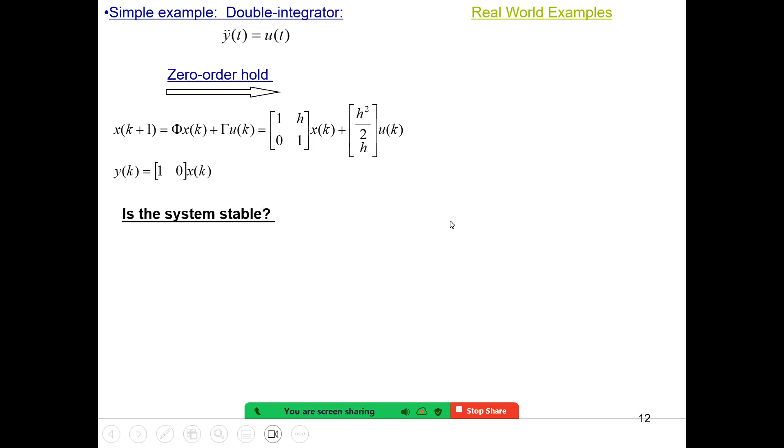One, but it's a repeated pole. So therefore, is the system stable? It is unstable. It is not even marginally stable, because the one is a repeated pole. We emphasize that, so it is not stable.

Then we need to build a feedback controller to change the behavior because the system is unstable. Then we need to place the poles to some desired positions. Can we do it? Let's try the proportional control, or the state feedback.

So, minus L xk. If I write down the individual terms for the controller, it's just L1, L2, a linear combination of the state variables. And then we want to find out what L1 and L2 are to meet the requirements.

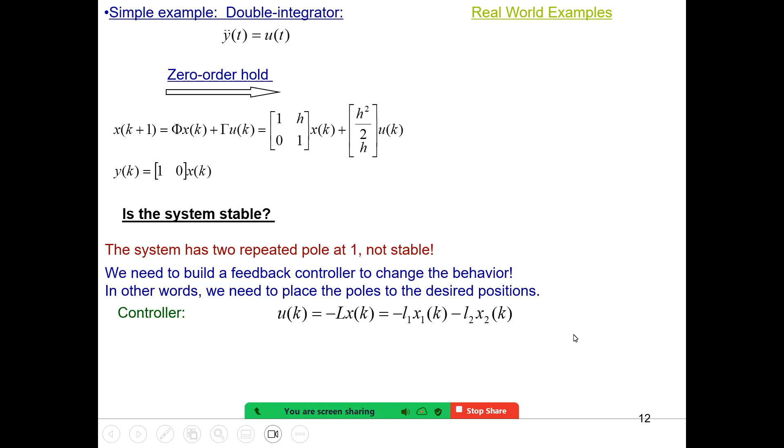Okay, then let's just plug this expression into the system. This is the model. Now we replace this u by minus L x. Overall we get phi, and this term becomes gamma times L x, so phi minus gamma L x.

Now notice, for the original open loop, the matrix is phi. So after feedback, the matrix changes into phi minus gamma L. So the system matrix has been changed by feedback. That's the whole point of feedback: it will change the property of the system, because the eigenvalues of this matrix phi have been changed to the eigenvalues of this different matrix, phi minus gamma L. And the L are the design parameters.

We can change the poles. Okay, this is where we are: we want to compute what L1 and L2 are.

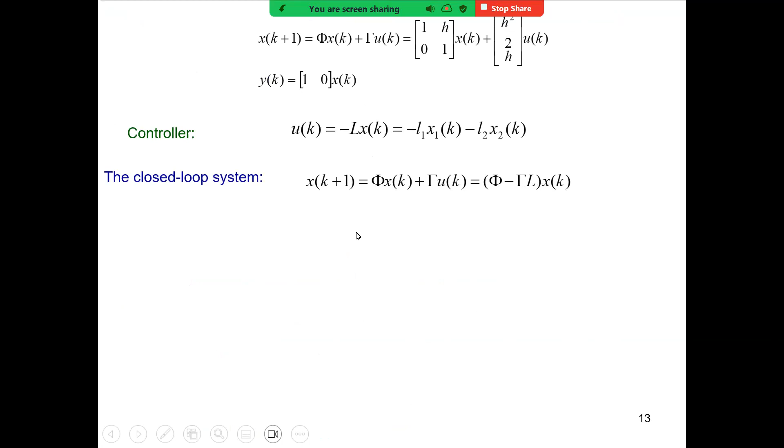Now this is one way: just plug in your equation into the closed loop. You want to find out the poles of this closed loop, which will depend upon your L1 and L2. So how do we design the control gain L? Let's do the calculation.

So this is gamma, this is L. We do the matrix multiplication, and we get a 2 by 2 matrix. Then there's phi minus gamma L. We already know phi, phi is here, minus this gamma L gives us a different matrix from the original, 1, 1H.

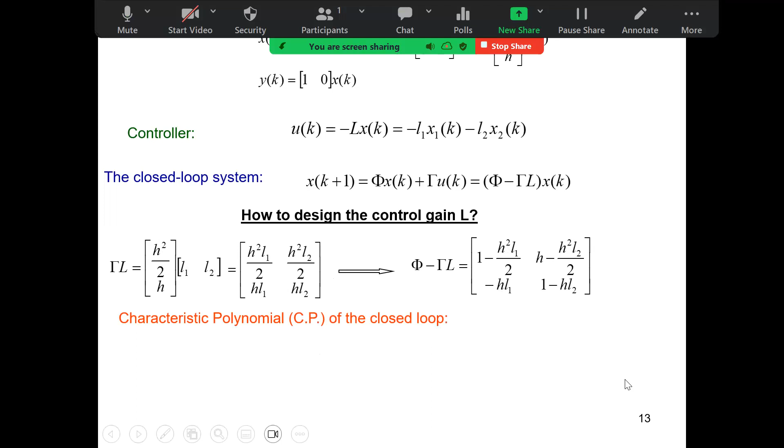Then we can compute the characteristic polynomial of the closed loop, of this phi minus gamma L, which is computed using the identity matrix I. So this matrix will change: the diagonal term, the I, so Z minus this term, and those two terms get a minus sign, changing the sign. That's the meaning of this matrix. Then you try to compute the determinant of this matrix, which will be the characteristic polynomial of this matrix phi minus gamma L.

Of course, then you know how to compute the determinant: this term times this one, minus the multiplication of those two. After some organization, you end up with a second order polynomial. From this polynomial, you can tell there are two coefficients, and those two coefficients depend upon the gains L1 and L2.

Okay, this is where we are. So we use the feedback control, or the proportional control. Then we change the characteristic polynomial of the system. Now the coefficients depend upon the gains.

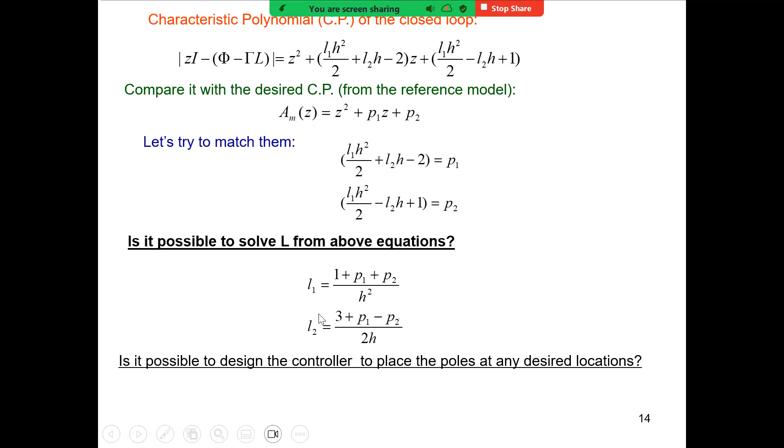Well, for this double integrator, now we can answer the question: is it possible to design the controller to place the poles to any desired location? Yes, because for any desired location, which means I can put any value of P1, P2 — that doesn't matter. As if I know P1, P2, I can compute my L1 and L2 to make the match.

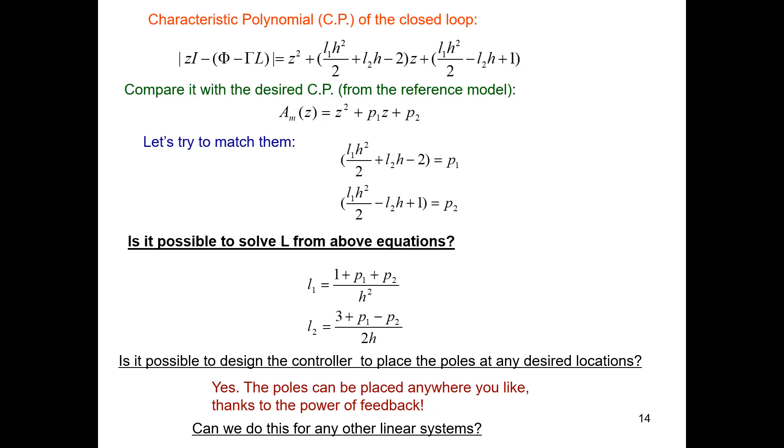Okay, now the poles can be placed anywhere you like, because of the power of feedback. But can we do this for any other linear system? Here, we only solved the problem for a very special case. Of course, we want to know, how about a general case? Let's find out the answer.

To answer that, this is the time we want to use the controllable canonical form. We first say if a system is in the form of a controllable form, last time I mentioned that it will make the design very simple. Now let's try to see how it can help us solve the pole placement problem.

So we say this is the controllable canonical form. This phi tilde has the first row as the non-trivial row. All those coefficients are taken from the transfer function, from the denominator of the transfer function, and all the other rows are completely fixed in this form. The gamma tilde is also in a very special format — only the first element is 1, all the other values are 0. Like I said, the elements in this first row are taken from the transfer function, from the denominator of the transfer function.

Now, let's try to solve the problem when the system is in this form. But first, I give you this information: can you answer this question? If you know this is the canonical form, the controllable canonical form, how do you get the characteristic polynomial for this matrix?

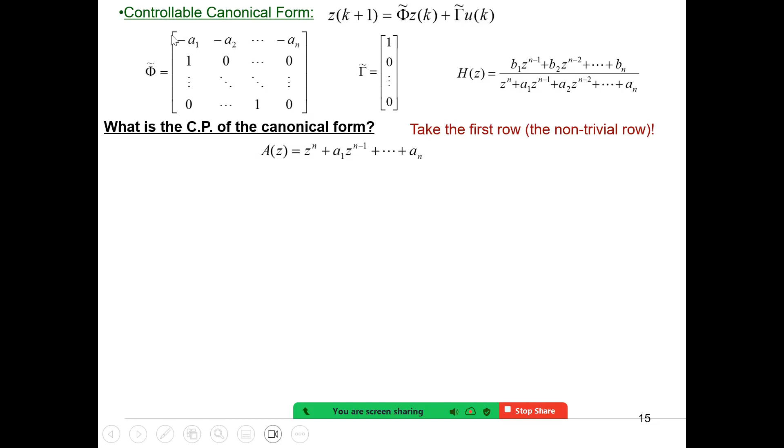This is important to remember: the characteristic polynomial can be taken from the first row for the controllable canonical form. Now, let's look at the state feedback controller. I'm going to design a controller, state feedback.

Then we want to say what happens to the closed loop if I use this controller. Okay, and then I plug it in. So the U now is minus LZ, right? So here I get this phi minus gamma L times Z.

Now let's look at what is the gamma L. Gamma times L. This is the gamma, right? 1, 0, 0. If I multiply by a vector, a row vector, easily you know this will be the form of this matrix. Only the first row, right? The first row are non-zero numbers, multiplied by all those numbers. All the other values are 0.

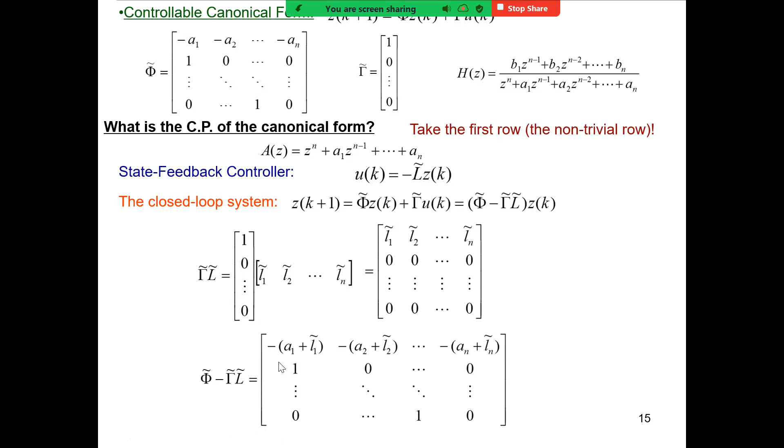Is that clear? Okay, so this is gamma times L. And then we can now, because this is gamma times L, easily compute the phi minus gamma L will be in this form. Okay, so this is where we are. If a system is in the controllable canonic form, if we use our state feedback, this is the system matrix after the feedback.

Let's take a close look at this matrix here, phi minus gamma L. Let's look at the first row, the non-trivial row. Does the feedback controller change the non-trivial row? Actually, it can change, right? Every element has been changed by the gains. Every element of the non-trivial row can be changed independently. The L1 can change the A1, L2 change A2, Ln change AN.

Then how about the trivial rows? Does feedback affect the trivial rows? The trivial rows are not affected. Why? Because the gamma takes a very special form. Gamma, only the first row is 1, the other values are 0. A very special form, that's why it only affects the first row, does not affect the other rows. So the trivial rows keep the same. The input does not change other state variables directly, which will simplify the controller design.

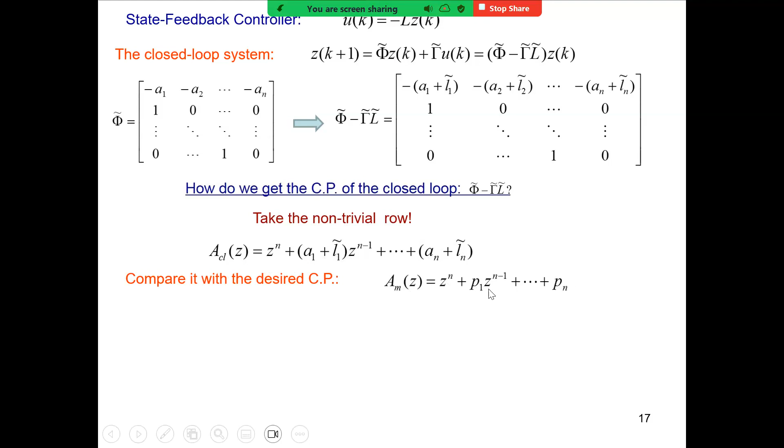And now the answer should be clear now. If we compare this with the desired characteristic polynomial, can you design your L1 and L2, Ln to match those coefficients? And the answer is very simple, right? I want to match this P1, of course A1 plus L1 equals P1. So L1 is just P1 minus A1. You see, trivial, so you get answer, very simple answer.

When a system is in the controllable canonic form, you just design the gains such a way that you take the difference of the coefficients. For each coefficient, take the difference. P1, this is the desired coefficient, this is the real coefficient. Take the difference, that will be the gain of the feedback control if a system is in the controllable canonic form. Okay, how easy it is if it is in the controllable canonic form.

So here is the final answer. If a system is in controllable canonic form, this will be the design, this will be the controller. Use a very beautiful solution. But of course, we have to answer the question: how about the system in other forms? Then we have to relate any other system into the controllable canonic form. Can we transform any linear system into controllable canonic form?

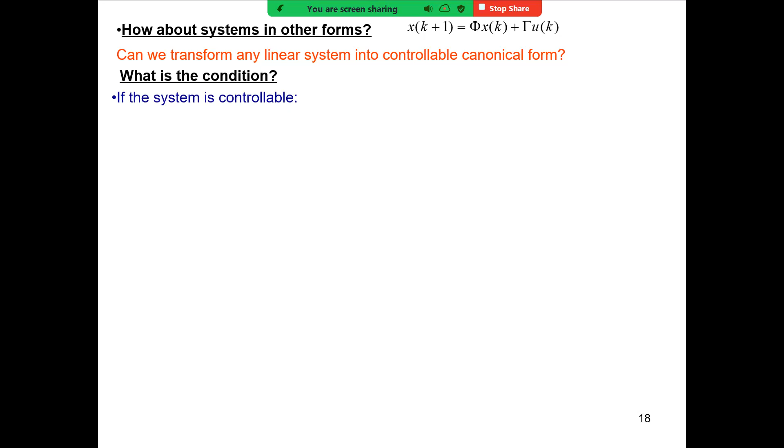What is the condition? Of course, right? It should be controllable. If a system is controllable, there exists a transformation of the state variable, a transformation matrix T, that can transform it into a controllable canonical form. If a system is uncontrollable, can you transform it into a controllable canonical form? Cannot. Remember, if a system is in controllable canonical form, of course it is controllable. So if a system is uncontrollable, how can you make it controllable by a simple mathematical trick? It cannot happen in reality.

So therefore, we know that it cannot happen. It has to be controllable, but if it is controllable, we can do this. We can do this.

Okay, then how are we going to design the state feedback for the general form? If a system is controllable, then the design is very simple because we know the answer for the controllable canonic form. We design the controller for the controllable canonic form first. So we know the answer, and then this is supposed to be the controller.

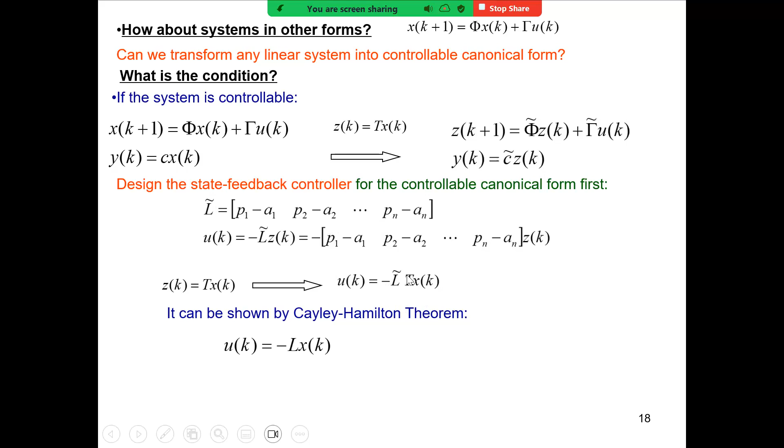Okay, that's the how. Okay, now here, let's look at the example. We will look at the design example, but the whole problem becomes an algebraic problem.

You are given a pair, phi and gamma, from the system model, state space model. You try to find the L such that phi minus gamma L has any desired eigenvalues. You want to change the eigenvalues? We know that eigenvalues are the poles. So, okay, we can say we have an answer. We can choose the L such that the characteristic polynomial of phi minus gamma L is any desired one.

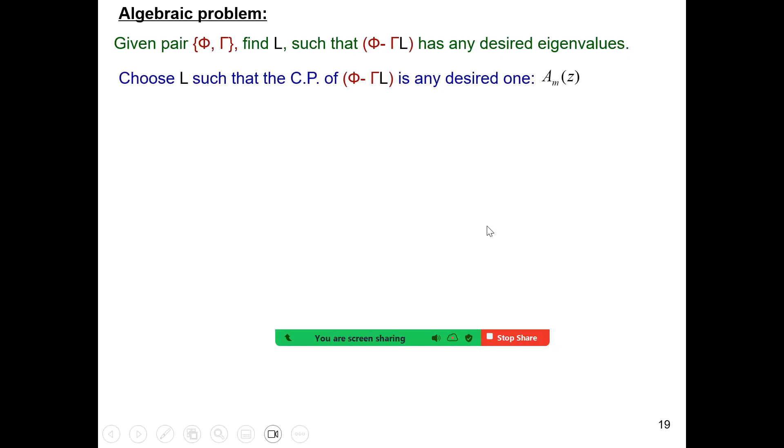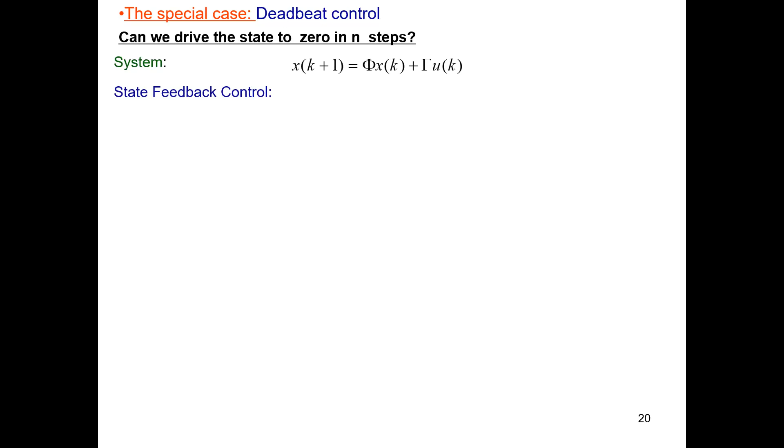This is a special property for the discrete time, it can happen. Now we have the system equation, we use state feedback, and we get a closed loop system. It will change the matrix from phi to phi minus gamma L. Then the characteristic polynomial of the closed loop matrix phi minus gamma L is here. We match the desired one.

Let's say I already designed my L to make this happen. Now let's put the desired closed loop polynomial in a very special form. I want to place the poles at zero. If all the poles are zero, what are those coefficients, P1 through Pn? I want to make the roots all zero. What are those P1, P2, Pn? Zero, right? Then all the poles will be at zero.

Very special case. There are multiple poles, but is the system stable? Is the system stable? Come on, think about it. Zero, multiple zeros for the discrete time, that is the most stable position, right? So even though it is multiple, it is very stable.

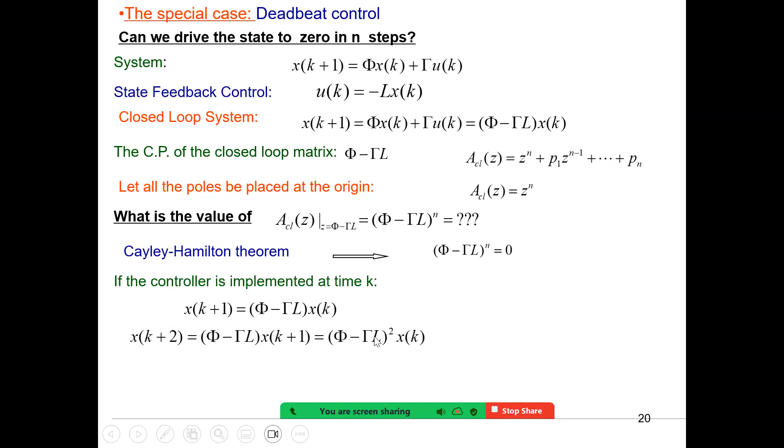And now we can use this property to show the deadbeat property. If the controller is implemented at time k, and we apply this for n steps: xk+1 is phi minus gamma L times xk. xk+2 is phi minus gamma L squared times xk. At the n-th step, xk+n is phi minus gamma L to the power of n times xk. But what is this, phi minus gamma L to the power of n? Zero. So we can drive the state to 0 in finite time.

Can you do that for a continuous time system? For continuous time, no matter where you place the poles, all the numbers, because you cannot place the poles at minus infinity, it only goes to 0 exponentially. It will not go to 0 in finite time. Is that clear? So deadbeat is a special property for the discrete time.

But although it's so good, there is no free lunch. Deadbeat is rarely used in practice because the energy consumption is too high. In other words, the magnitude of the control signal has to be very big to achieve that. Any questions?

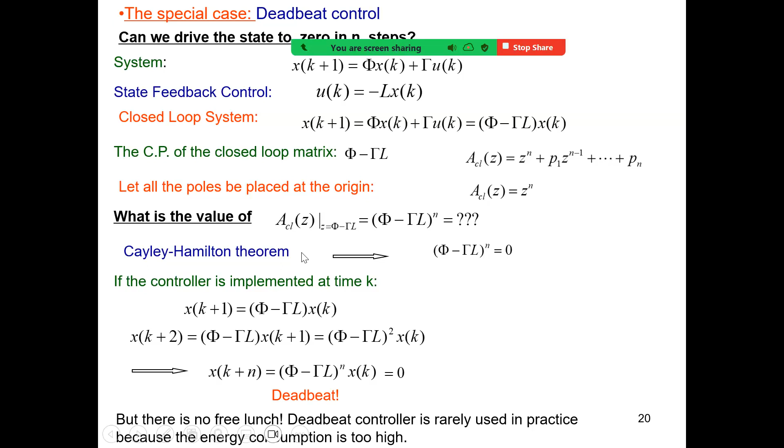So here again, you can see the power of the Cayley-Hamilton theorem. Well, finally we have answered the question: what if the system is uncontrollable? What does that imply? We know that if a system is controllable, we solve the problem using Ackermann's formula.

Now, actually, there is another way to say this without looking at the matrix, by drawing the graph. So you have x1 and x2. Then you look at the equation: the first equation says that x1 depends upon x1 and x2. So x1 depends upon x2, and is also affected by the input. How about x2? The x2 actually depends upon x2.

So from this graph, you can easily say, does the input affect x2? No connection, right? So that's another way to say it is not controllable. In other words, x2 is running by itself. But x2 can affect x1. Okay, fine.

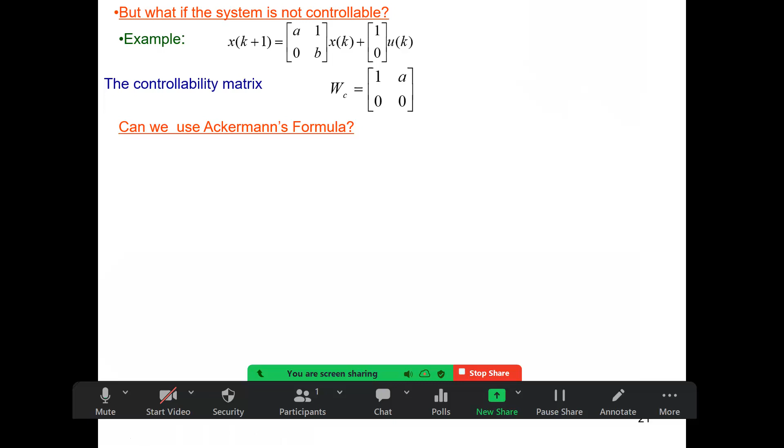But of course, algebraically, just to get the controllability matrix, you know it. And then we say, now, if this is the case, can we use Ackermann's formula? Ackermann's formula involves the inverse of this matrix, right? So now you say, okay, I cannot do it.

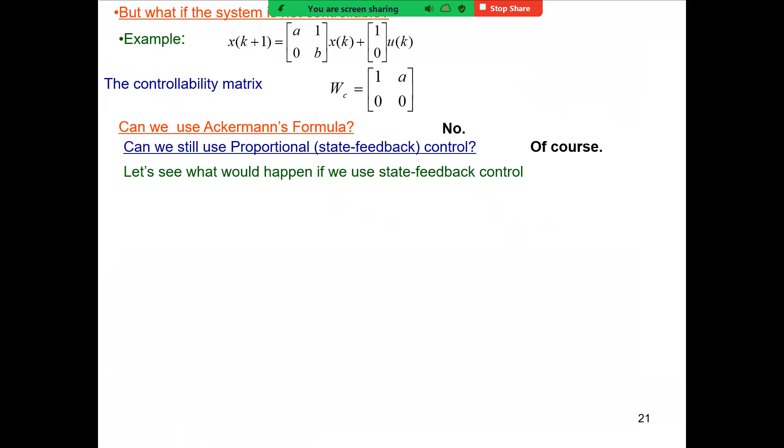But can we still use the state feedback control? So why not, right? Of course, we still use it. Even though you don't know Ackermann's formula, it's good that everybody prefers the first one, right? We can do that direct way. So let's say we do it directly and find out where can we design the gains. Can we design L1 and L2? Place the poles. Let's just do it.

We compute, we plug in this one into this equation, and then this will be the matrix after the feedback. Now you look at this matrix. Without even going further to compute the characteristic polynomial because of this special form, what are the eigenvalues or what are the poles of the closed loop? Right, A minus L1 and B, because it's in triangular form, it's easier. So those are the poles after the feedback.

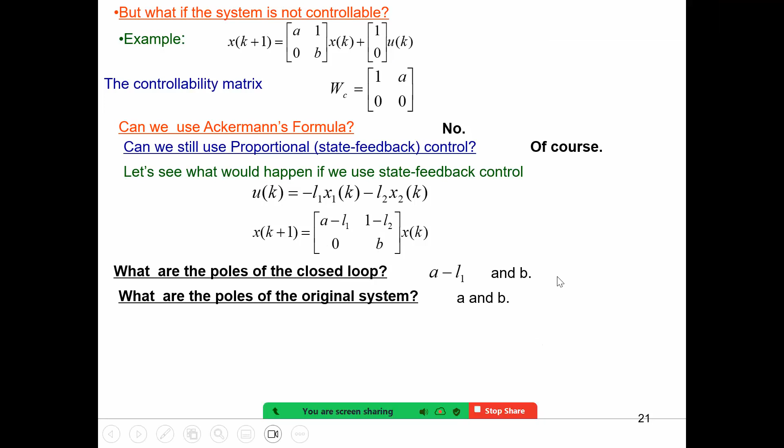Now you will notice something. If I look at the original system, what are the poles for the original system? Is A and B, right? So now after the feedback, you can design both L1 and L2. Can you design L such that the poles can be placed to any desired position? You already know I can only change one of the poles. The other poles cannot be changed. Clear? So the pole, the A can be changed, but this B cannot be changed.

Okay, but once a system is uncontrollable, that does not mean it's hopeless. It depends upon the poles which you cannot change. Maybe those poles are stable, right? So if the pole is still less than 1, this uncontrollable mode is stable, then we call such a system stabilizable, even though it is uncontrollable, but it is still stabilizable. If this one is bigger than 1, since this mode is unstable, then there's nothing we can do to control this system, unless we make major changes to the system.

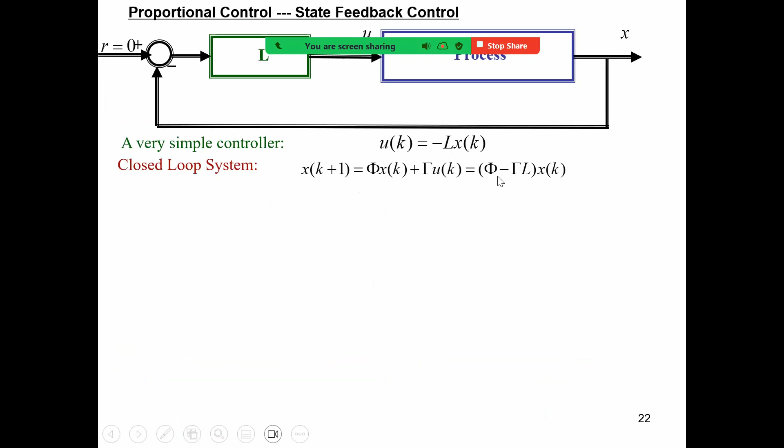Okay, let's summarize what we have learned. So we use the proportional control, a very simple way. Very simple controller, right? The input is just the linear combination of the state variables. Then we have a closed loop system, right? Now the matrix changes from phi to phi minus gamma L. If a system is controllable, the poles can be placed anywhere. Those desired poles are specified by the reference model. If the system is uncontrollable, then some of the poles cannot be moved.

If the uncontrollable poles are stable, then one can still control the system to some degree. If the uncontrollable poles are unstable, then we have to make major changes to the original system such that the system becomes controllable.

Now, finally, can you suggest a simple way to change the controllability? So you look at phi and gamma. Which one is easier to change? Gamma. But when you change gamma, what does that imply? It means that you change a different type of input, right?

It's like, you are sick, you take one medicine, it doesn't work, you change another medicine, another type of input. Or in other things, like if you are driving a car, now you try to control the direction or the movement of the car. So the position of your car, the direction of your car, is the output. Now there are two inputs. One input is your steering wheel, the other input is the accelerator. If you use the accelerator, is the system controllable?

So this is where we are. We've shown that with a very simple state feedback, we can place the poles anywhere we like if the system is controllable. But the problem with this controller is that we need the state variable, the information about all the state variables. In many practical problems, we may have only one sensor to measure the outputs to save cost. So the output is available, not all the state variables. So how do we solve the control problem?

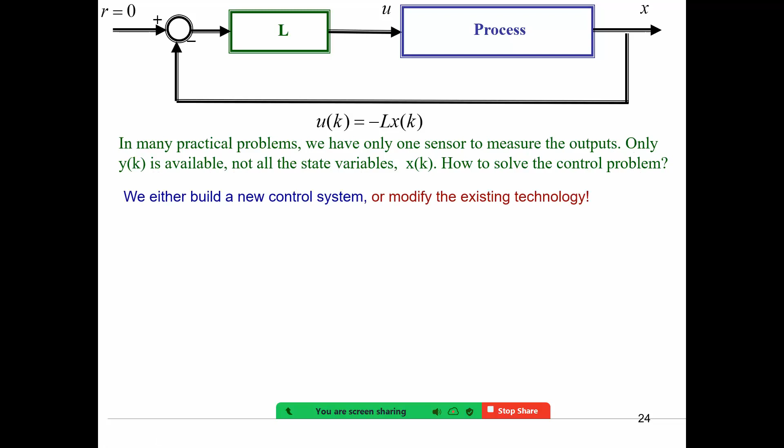If we face this kind of issue in the real world, we can either build a new control system or modify the existing technology. Normally the second way is cheaper, right? It can save cost. So which way is simpler? If we want to just modify the existing one...

We still want to use this one, but we have to solve the issue that we only have the output signal, not the state variable. How are we going to get the missing state variable? Then the question becomes, is it possible to estimate the state variables? If yes, then we can just replace the state vector with its estimate, let's say the estimate is x hat. So that's the whole idea for this approach, where we only have the output signal.

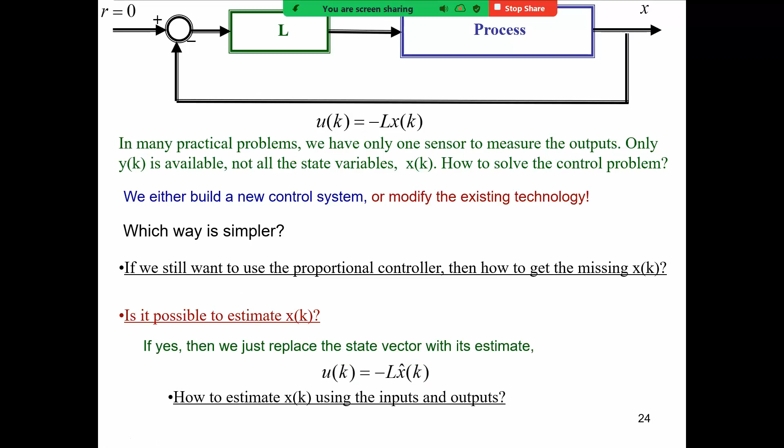Then how are we going to estimate the state vector with the input and output? We need to build an observer to estimate the state variables. But just be cautious, the term observer is just an algorithm, a program. It's not hardware, a sensor. So let's think about how we're going to build an observer. We want to build an algorithm which can estimate the state variable.

But remember, we already have this model. The model is already available. You know phi, gamma, c completely. The only missing information is that you cannot measure the state variables directly. If you know the initial condition, you can compute it exactly, but we don't know that, because if I don't know the state variable, I don't even know the initial condition, so I cannot use it directly. What is available is just the input and the output. So I know the output y.

But you say, hey, a very simple way we think of is that I have the model, therefore I just use this model. I compute my state vector—now I don't know the actual value, but I just use this model to compute my x hat. With exactly the same model, I compute that. Will that work? So I have two systems, right? I keep a copy, I know the model, and I just use it. This is what I call the naive observer, where we say, what could be the problem?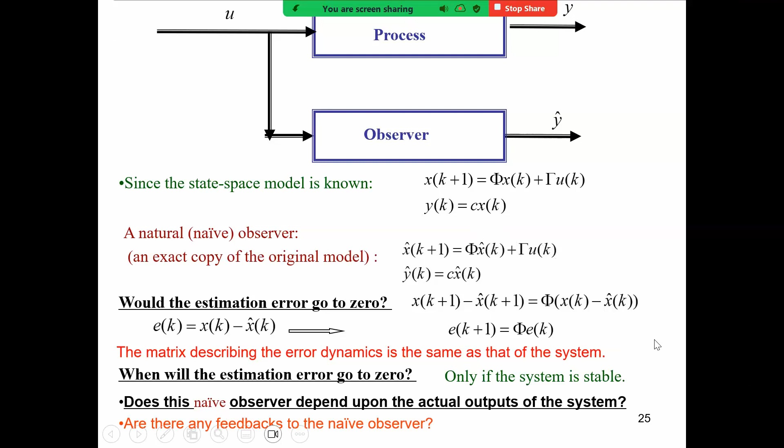So now let's try to improve this observer. Now I have this observer. We know that this observer will compute the estimated output. What is the desired value for the estimated output? It is the actual output, right? You know the actual output, and this is the computed output. Okay, I want to make this y-hat go to y.

And then can we use a feedback mechanism to improve the observer? Feedback means you measure the actual output, you compare, and then you do the correction. You measure, you already have, you compare. I would compare with the actual one, and then I do the correction. Since it's a linear system, the correction term normally is proportional to this error. Okay, let's try this. A very simple idea, but it's still based upon the feedback, right?

I know the desired value. I look at the actual value from this observer, and then I want to make this error signal small. Okay, let's try the feedback. So therefore, now let's look at the new form of this observer. In addition to the original model, I add something else. Those are the correction terms.

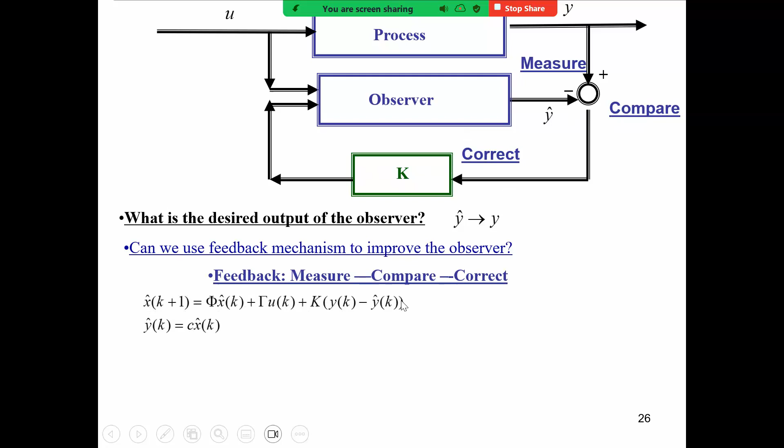Okay, and with this term, let's try to analyze the dynamics of the error signal. This is the model of the system. This is the observer. We are interested in the difference between x-hat and x, so x minus x-hat, xk plus 1 minus x-hat. This right side, this minus this, I will give phi, x minus x-hat, gamma uk disappears, right? But I have this minus k, y minus y-hat. Okay, is that clear?

Now we just plug in the expression of y and y-hat, right? Y is just cx, y-hat is c x-hat. And then let's define the difference of the state variable as the estimation error, right? We get ek plus 1 equals phi. This is ek here, right? This is cxk, and this is c x-hat k. That becomes k times c ek. So finally we have phi minus k times c, ek.

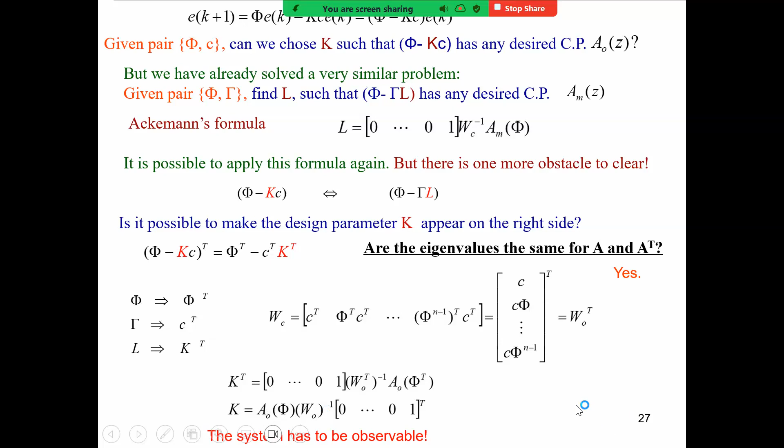When you apply Ackermann's formula, this W involves the inverse of the observability matrix, so therefore the system has to be observable.

Now, is it possible to make the estimation perfect in finite steps? In other words, can we make the error go to 0 in finite steps? All right, so this is the equation for the dynamics of the errors.

Now, we start from the beginning. At the first step, it's phi minus KC times e. At the second step, e of k plus 2 becomes phi minus KC squared. At the nth step, it becomes phi minus KC to the power of n, times ek.

Can we make this phi minus KC to the nth power equal 0?

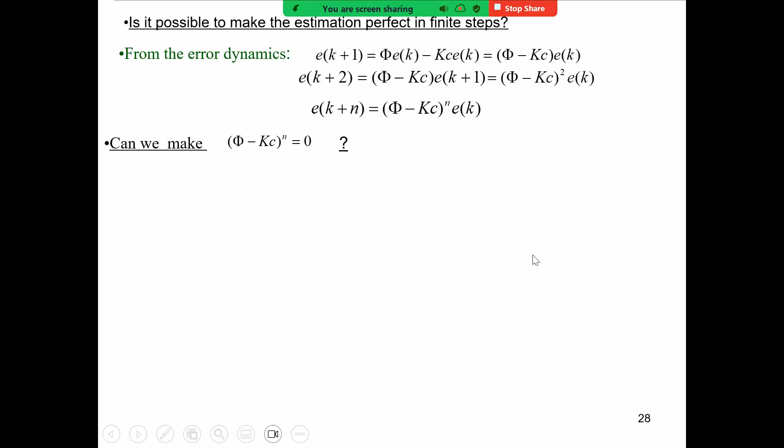How do you choose k such that you can make this happen? What are the poles of this matrix phi minus kc? All the poles should be 0. If you choose this one as this polynomial, a very simple one, all poles to be 0, and we know the matrix satisfies its own characteristic equation, then phi minus kc to the power n equals 0. So you can say we have used this Ackermann's formula, we have used the Cayley-Hamilton theorem many times. It's very powerful.

Then the observation error goes to 0 at most n steps. This is what we call the deadbeat observer. It looks very beautiful, but in reality we don't use it. There is no free lunch. The deadbeat observer is very sensitive to noise. So although in theory we have this, we don't use it.

Now let's summarize what we have learned about the output feedback controller. Remember, we are going to solve the problem where only the output information is available, we cannot measure all the state variables. The first step, the controller design.

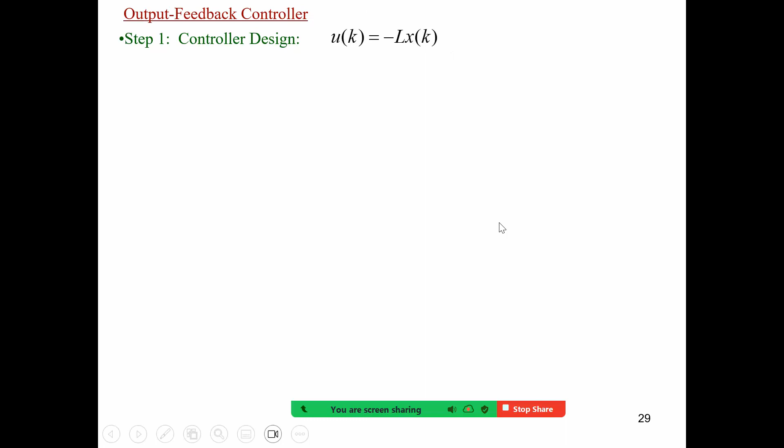Even though the state variables are not available, at the first step you assume it is available. You design a state feedback, and you choose L such that the closed loop matrix phi minus gamma L has a desired characteristic polynomial. This characteristic polynomial from the desired one is from the reference model. It can be calculated by Ackermann's formula, or you can use the direct comparison.

The other way is you get the characteristic polynomial of the closed loop and match the coefficients. Then, because X is not available, we have to estimate it. So you have to design an observer to estimate the state variable. This observer will depend upon the information from the input and output, and then it will try to compute the estimated state. So this is the form of an observer.

It uses the model of the plant, but it adds a correction term, the feedback term. And then it turns out that the dynamics will depend upon the gain k. Therefore, you can choose your k such that this observer matrix phi minus kc has a desired characteristic polynomial, a naught z. Remember, this a naught z is different from the reference model. You can design that.

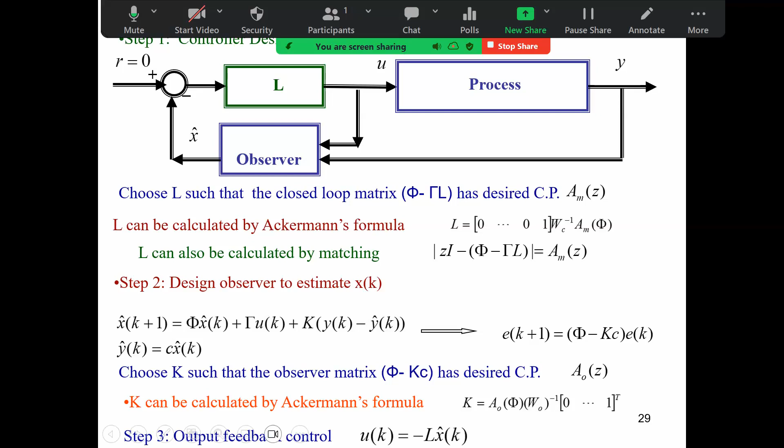3 steps, I repeat again. The first step, you solve the simplest problem: all the state variables available, get the answer, you design your L. Because the state variables are not available, then you design the observer. This is the observer. And then you get the answer, design your K. You can estimate the state variable, but in your observer, you estimate the state variable by X hat, because X itself is not available. So don't forget, the final answer should be minus L times the estimate of the state variable. Is that clear? Any questions?

Okay, now here I want to mention one common mistake made by students. Let's say in your final exam, they ask you to design an output feedback. Then they give me the answer: they have the phi gamma, they use Ackermann's formula. So they just tell me, they give me the K, they give me the L, and then they give me the K. They don't write anything about what is the controller, what is L.

They don't even mention what is your state feedback. And finally, they don't mention what is minus L times X. What is the observer? When they design the observer, they just give me the answer K. What is the observer? This is the observer. So you have to write down the details such that I know what numbers you are calculating. Finally, you just give me the answer L and K, probably you are going to lose 50% of the marks. You just tell me you know how to apply the formula. I don't know whether you understand the meaning of this formula. So that is a common mistake. I want you not to repeat those silly mistakes.

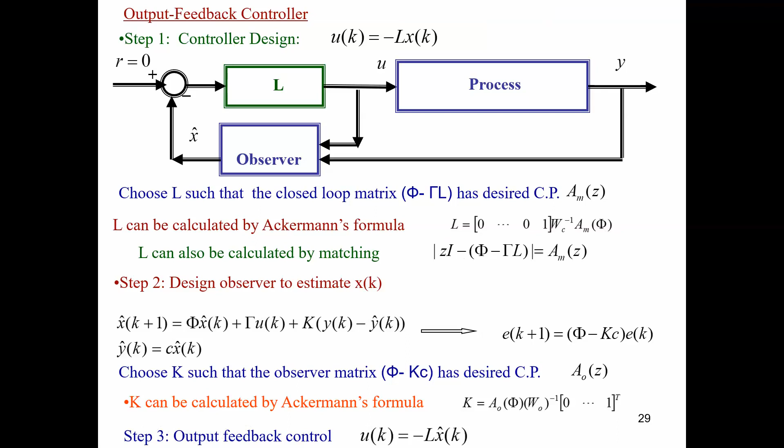All right, finally, we have to consider the effect of the disturbance. So far, we didn't consider that. In this model, there's nowhere for the role of the disturbance to appear. We only consider that the state depends upon the current state and the input.

But we know in reality the disturbance may occur at any moment and everywhere. There are many types of disturbance. The load disturbance is the most often encountered. If I have an antenna, there may be wind that blows on the antenna, or on a ship there may be waves hitting it. Or for a motor, there may be a load.

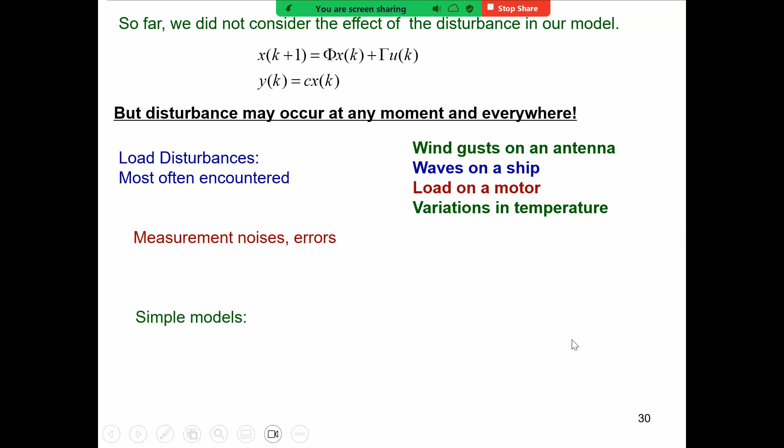Suddenly there is additional load on the motor, or for the temperature, there may be variations. So those are the many types of disturbance you may encounter in the world. And also there are other disturbances like measurement noise, the errors. Even though in reality all those disturbances look very complicated in different forms.

But like I mentioned, when we build the mathematical model, the model itself may be simple because there are only good models and bad models. There are no true models. You don't expect to get a perfect model which can describe the true reality. You cannot do it. So we always use simple models to describe that. The simple models for the disturbance could be a pulse disturbance, could be a step, or could be a ramp disturbance, or could be a sinusoid.

In the following, I'm going to give examples of disturbance, and then you tell me what kind of model you can use to model this type of disturbance. Okay, this one.

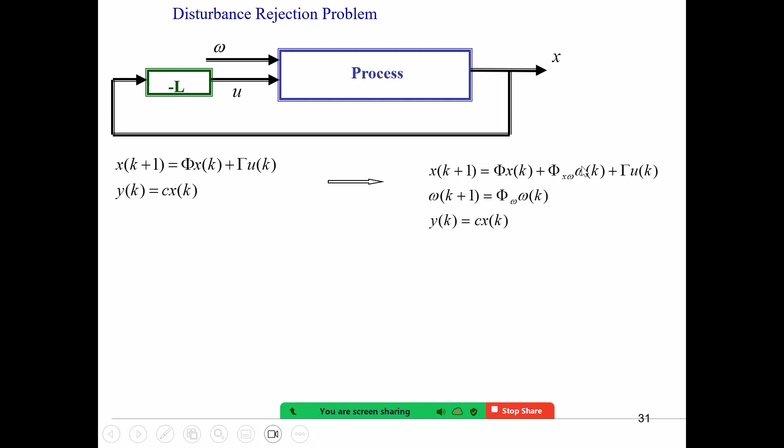Well, the first question: we know that disturbance happens. Can we just simply turn a blind eye to the disturbance, as if it does not happen? So we simply ignore the disturbance. If we ignore the disturbance, what would happen? First, in reality, something must appear differently with or without the disturbance.

Mathematically, let's check it out. If I just use the same controller as if there were no disturbance, let's plug it in. This uk is just minus Lx, so I have phi xk plus phi omega k plus gamma uk. Then this u is Lxk. You plug in, and we have phi minus gamma times Lx plus there is an additional term omega k there. If you look at this equation...

In the simplest case, let's say I make the system stable. Phi minus gamma L is a stable matrix. I choose my L in such a way, then for the stabilization, I want x to go to 0. But if omega k is a constant, will x go to 0? You have a stable disturbance, you have a stable system, but it's affected by a constant. The output will be a constant, right?

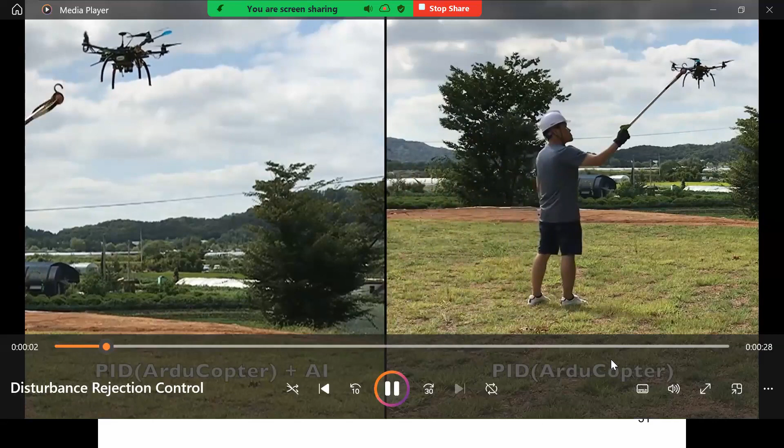This is from mathematics, and now I want you to see an example with or without disturbance rejection. If you add a load disturbance, you can see there is a difference. This one is without considering the disturbance - it will just fly away. This one, we include the disturbance term in the controller - we have to do disturbance rejection. If I add something, it still stays there. So we have to deal with the disturbance. The disturbance cannot be simply ignored. We have to find a way to address it, to improve the performance of the system.

Let's look at this equation again, and ask the question: what is the state of the system? Let's recall the definition of state. In the first class, we said state is the information such that we can predict the future, combined with the information about the input. If there is a disturbance, if we know this x and the input, can we predict the future xk plus 1? Look at the equation. Yes or no? We cannot. So therefore, for this system, because of the disturbance, what do we need to predict the future? In addition to x and u, we need omega, right?

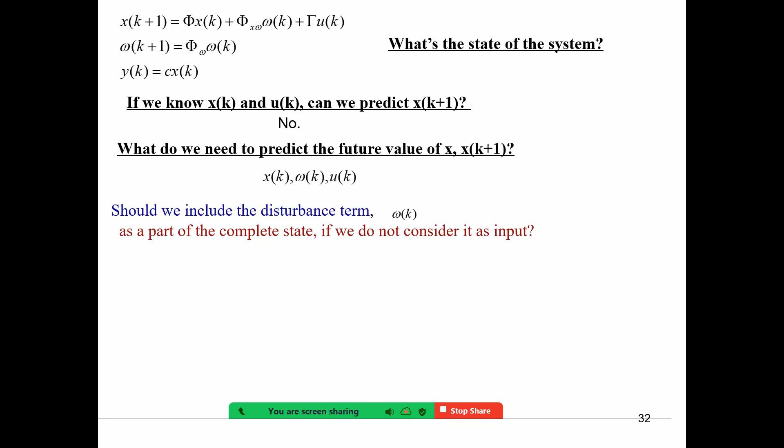So we need x, omega, and u. Now from the definition of the state, if we consider this input - well, we only include u as the input, we don't consider omega as the input - then what should be the state? Should be both x and omega, right? Therefore, should we include the disturbance omega as a part of the complete state if we don't consider it as input? The answer is yes. I already gave you the answer. It has to be a part of the state.

Therefore, we have to define a new state vector. We call it the augmented state vector. This is zk, which includes both x and omega k. Such that it will be a complete state vector. Otherwise, with only x and u, we cannot predict the future. Therefore, we define a new one, which will be a vector with higher dimension because it includes not only x but omega.

Now let's write down the equation for this new state vector. Of course, it's the same equation but with new notation. Z k plus 1 - I put those two equations together. This will be a matrix, including both phi x omega, phi omega, times z, gamma, 0. Here, y equals just C0 times z. I just rewrite this equation with the new notation, z. Then if I look at this form, is it in the standard form of a state space model now? This is the state, depends upon the current state and the input. Yes, and that's what we need.

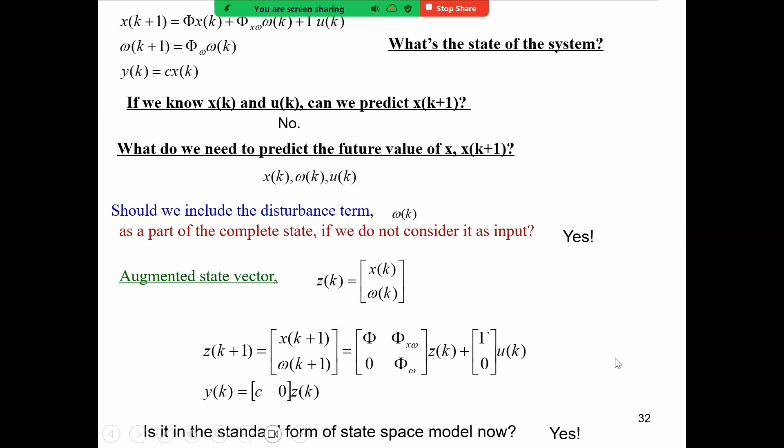Now, how are we going to solve the problem? First step: as in output feedback control, we assume the state variables are available. Here we also assume that the state vector z is available. Then we design a state feedback controller, but it includes both x and omega. So we design the controller assuming x and omega are available. So we design this L, which includes two parts: one is on x, the other is L omega on the disturbance. Now you may argue - hey, in this step we assume that the disturbance is accessible. Is this assumption realistic? Disturbance is not accessible, right?

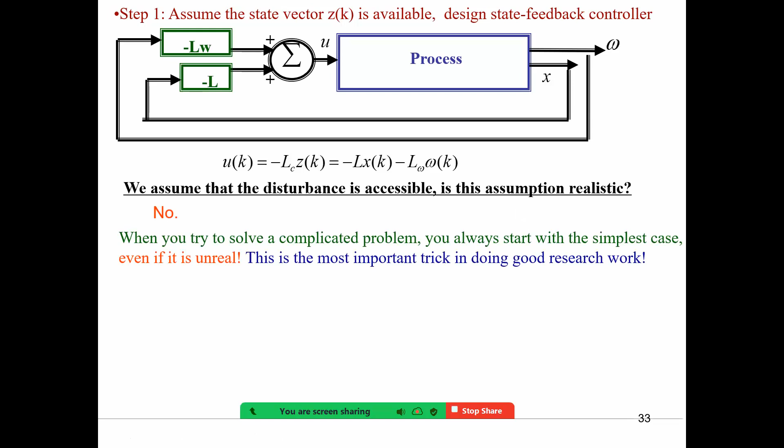When you try to solve a complicated problem, you always start from the simplest case, even if it is unreal. We know why we call it disturbance, because it's unmeasurable and the timing of the disturbance is also unpredictable. But we first solve the problem assuming we know when the disturbance happens, and also the type of disturbance. We have complete information about this disturbance. This is the most important trick in doing good research work: you first have to get an answer for the simplest case, even if that case will never happen in reality. But you have to get the solution to that ideal case. So even though we know the disturbance cannot be measured, we still assume it's available.

Let's say under this condition, what can we do? Then we look at the closed loop. Let's plug it in, this U becomes this one. And then we organize, this will be the closed loop equation after this controller. There will be two new matrices: this phi becomes phi minus gamma times L, and this phi x omega becomes phi x omega minus gamma times L omega. So we have two gains to design.

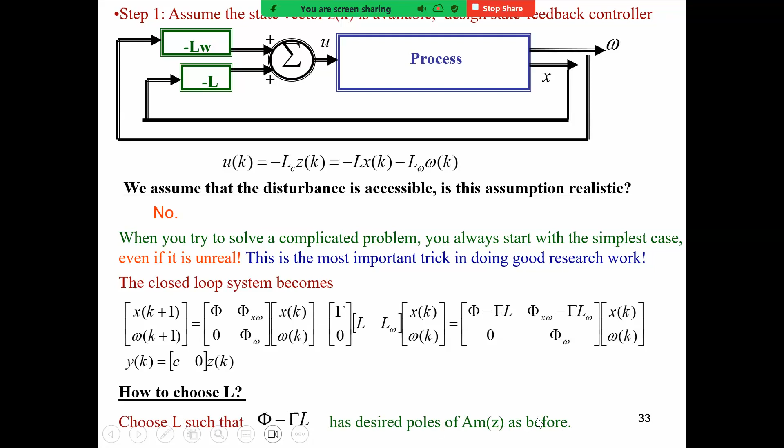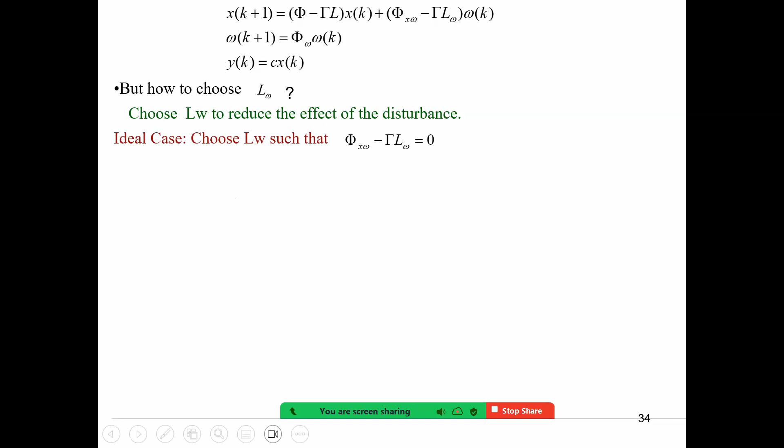Then there is some new design problem we have to solve: how we're going to choose L omega. This is the disturbance rejection problem, which means I want to choose L omega to minimize the effect of the disturbance. In an ideal case, I may choose L omega such that this full matrix, phi x omega minus gamma L omega, equals zero. That's a very special case. It can happen sometimes. Then in this case, disturbance can be completely cancelled out. But what if it is impossible to make this go to zero?

If this happens, we need to analyze the transfer function from the disturbance omega to the output. Now, because we want to analyze the transfer function, we need the Z transform. We do the Z transform on this closed loop. So this one, x k plus 1 becomes z x z, phi minus gamma L x z plus this one. Then we get the solution of x in terms of omega, then we get the transfer function. So y equals c times x, but x is replaced by this expression, then we get a very complicated form. But anyway, in this way we can get the transfer function from omega to y. We use h omega to express this whole thing here. Therefore, we know that the disturbance will affect the output, and we know the transfer function.

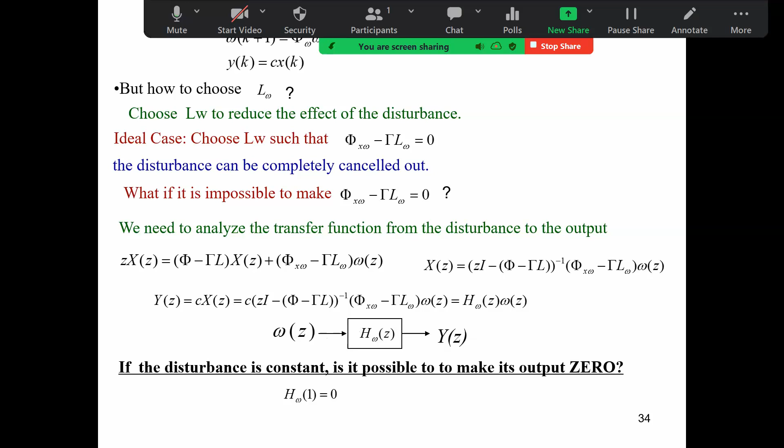Then in the same fashion, you can also deal with the sinusoid. Remember, for the frequency response, if you know the frequency of the disturbance, you can design the frequency response, the gain to be zero, by choosing the L omega. But now I just give you a simple case. So anyway, you get the transfer function. As long as you have some information about the disturbance, what type of disturbance, the frequency of the disturbance, then you can minimize the effects of the disturbance.

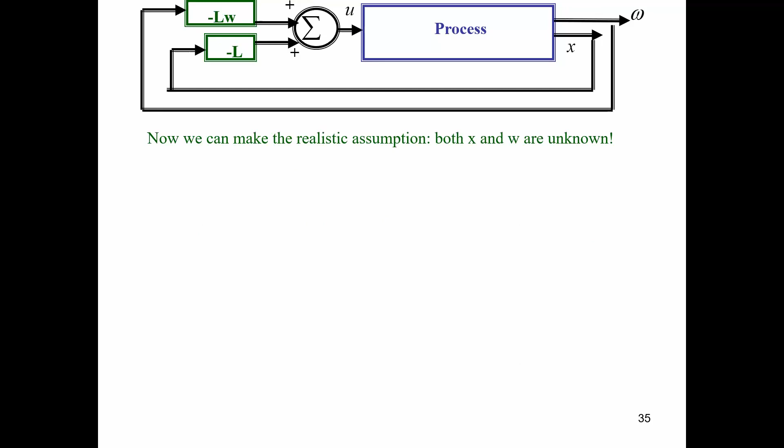Okay, so here we solve the design problem for the first step. We assume that we know the disturbance, we know the state variables. Of course, in reality, we don't know. Both x, the state variable, and the disturbance are unknown. What should we do? But have we already solved the case when x is not accessible?

We build an observer, right? So therefore, step 2, you just design the observer to estimate both x and disturbance, because disturbance can be treated as part of the state.

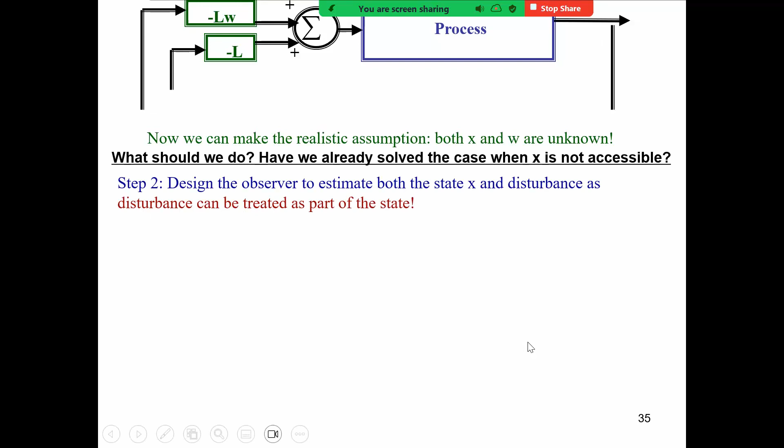You look at this equation, right? X is a state vector, Z is a state vector. Z includes both x and omega. But of course, the dimension of this new state vector is bigger than the original one because it includes an extra term. But anyway, it is in a standard form for a state space model. So as long as this model is observable, you can design an observer.

But remember, this observer matrix has been enlarged, from phi to this bigger one, and then you can design your K. You choose your K such that the characteristic polynomial of this matrix matches any desired one. At least they have to be stable. In this way, you can estimate both x and the disturbance omega. So even though they are not accessible, you can build an observer to estimate them.

So once you estimate that, don't forget the last step. This will be the final step. So your final controller depends upon the estimate of the state, depends upon the estimate of the disturbance. Okay, any questions?

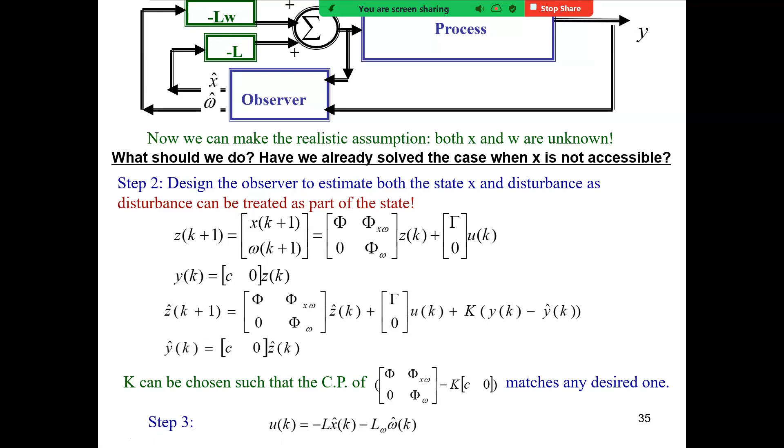Let's try to solve one problem. The double integrator again. Here, the double integrator is affected by a load disturbance omega. Now, this is a load disturbance, so it's a constant disturbance. For constant disturbance, just say omega k plus 1 equals omega. It's a constant, but you don't know the value.

Step one, we have to choose our L and L omega such that we can eliminate the effect of the disturbance. How to choose L? Choosing L is just a pole placement problem. We place the poles to the desired ones from the reference model.

For this simple problem, how do we choose L omega? You look at the form of this equation, and then you can choose L omega in a way such that the effect of omega can be completely eliminated, or you can make this omega disappear. How do you choose L omega such that in the closed loop equation, the omega can disappear? What can you say? What is L omega?

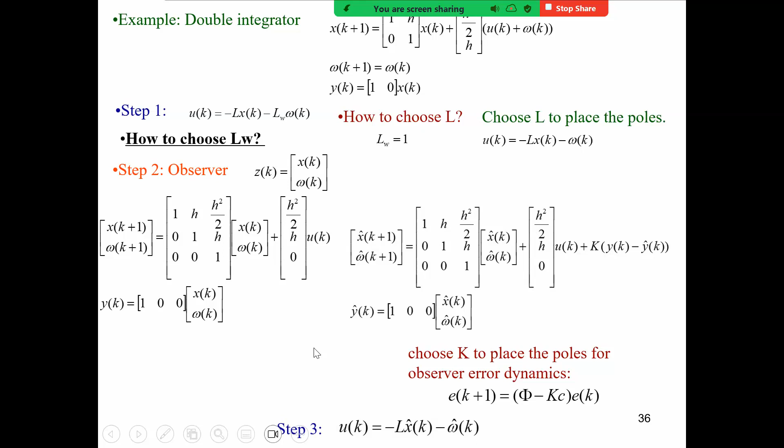Now let's look at the limitation of the controller we have discussed so far. This is the open loop, and then we do a purely state feedback. This is the controller we have designed.

Then the closed loop becomes this, just phi minus gamma L xk. If this is the controller we're going to implement, what will be the steady state output when this closed loop is stable?

What will be the output? Is it a constant? Yes, it is a constant, but that constant is 0, because x will go to 0. So of course, y will also go to 0.

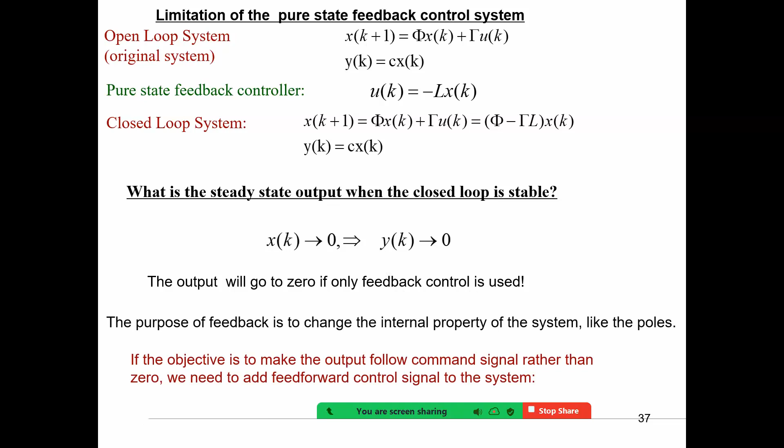But in reality, normally I don't want the output to go to 0. I want the output to probably go to some constant. So in this case, if we only use feedback control, the output will go to 0. Because the purpose of feedback is to change the internal properties of a system like the poles, if the objective is to make the output follow the command signal rather than 0, then we need to add a feed-forward control signal to the system.

In other words, what we need to find out - here is a feedback term, we need to find out the proper value for the feed-forward control signal. This will be the final part of today's lecture.

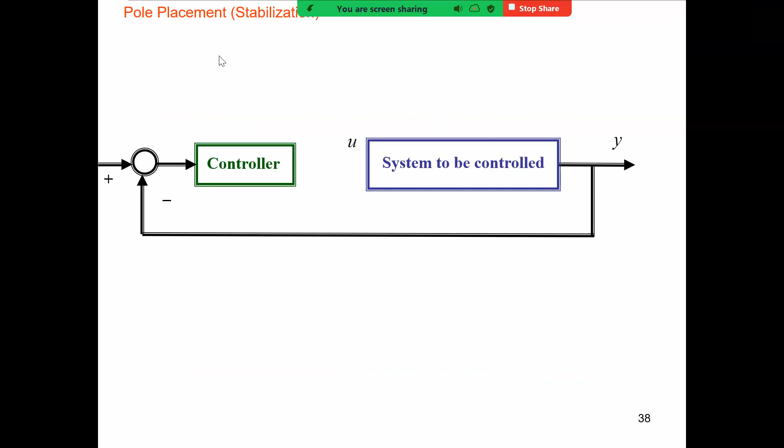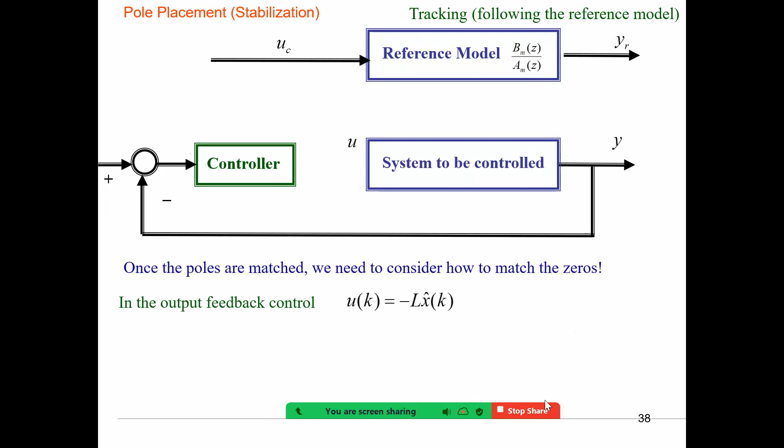Now, how are we going to match the zeros? In the output feedback control, this is the controller we use. The controller is purely feedback without any information from the command signal.

Now it's time to add the influence of the command signal, because I want the output to follow the command signal, such that we can make the transfer function. So finally, I want to make the transfer function from the command signal to the output match the reference model, not just match the poles. So therefore it involves both the feedback and the feed-forward.

Let's look at a very simple approach, we call it a naive approach, or just proportional control. The feed-forward control signal, I just make it proportional to the command signal. So LC is a constant. I design that.

Would that work? Let's try to work it out. Here, this is the feed-forward term. I want to add this to the original feedback control. So finally I have minus L x hat plus LC times UC.

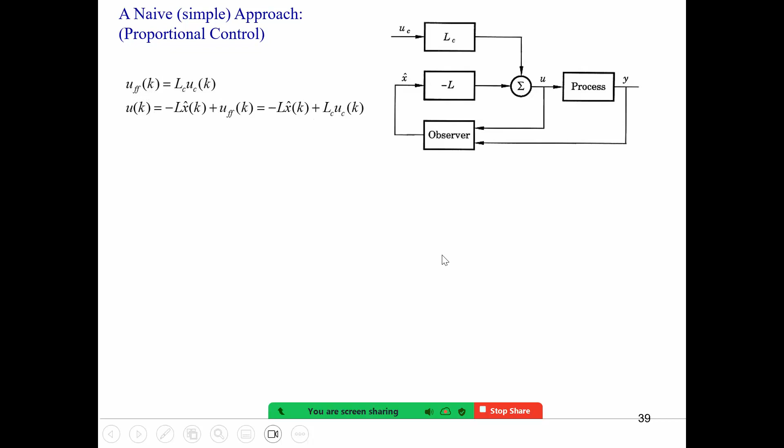Let's try to analyze the closed loop system. So I have xk plus 1 equals phi xk plus gamma u. This is the original model. This is the output. We use output feedback, which means I need to design an observer to estimate the state. Then this is the input.

The input doesn't only consider the feedback term, I have the feed-forward term, which is a simple way, just LC times UC. Let's try to analyze the signals.

We say, let's define the estimation error from the observer, and then we'll simplify the equation right here. After the feedback, we plug it in. This is what happens: xk plus 1 equals phi minus gamma L xk, plus gamma L ek, the estimation error, plus there's some extra term, gamma LC UC.

And the estimation error, based on this equation phi minus kc ek, but we know I will make it stable, so we know that ek will go to 0. So therefore, we will set ek to be 0. Then yk will be c times xk.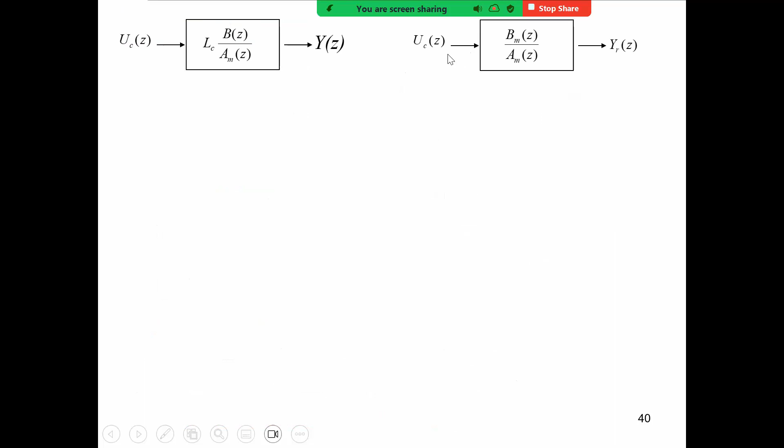But anyway, so if we follow this approach, this will be the transfer function from the command signal to the output. What's the objective? The objective is I want to make this transfer function match the reference model, BM over AM. Now let's try to choose LC such that this one matches this one.

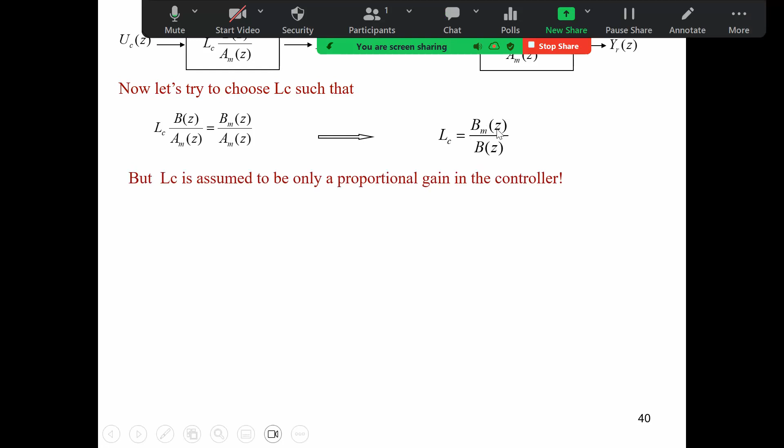Then I get the answer: this LC should be BM over B. But at the beginning we say, I want to take a very simple approach such that LC is just a proportional gain, supposed to be a constant. But it turns out, if LC is a constant, then those two cannot match, unless LC is chosen in this form.

So then what does that tell you? It tells you that the original design cannot work. You have to modify your design. Actually, here it already shows you the answer for your design: instead of a constant, you should replace LC by a transfer function.

We have to increase the freedom of the controller. This LC is the original design, where we say LC is a gain. But we know it doesn't work. It turns out LC has to be in this form.

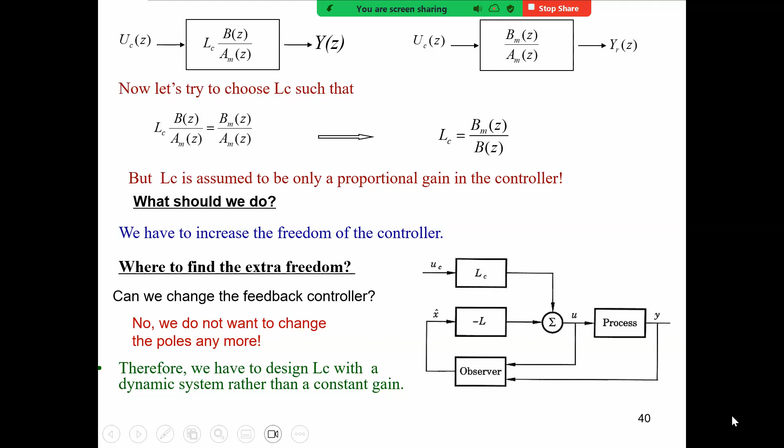Well, we can also do some logic analysis. Where can we find the extra freedom? Can we change the feedback controller? Shall we change L? If we change L, we already designed my L to place the poles, right? If I change L, I'm going to change my poles. The only extra freedom is this block. We no longer require LC to be a constant.

So I just require it to be a transfer function. What does that mean? What's the difference between a constant and a transfer function? If it's a constant, it's not a dynamic system, the output equals the input times a constant. If it is a transfer function, it means it's a dynamic system. The output depends not only on the current one, it depends upon its history. It will be described by a difference equation. The output will be a linear combination of the past values of the input and output. When we say the system is a transfer function, it's no longer a static system, it's a dynamic system, it depends upon the history.

All right, so finally, actually, we have this, what we call the 2 degree of freedom controller. So this is probably new stuff, right? You have not learned this when you were undergraduate.

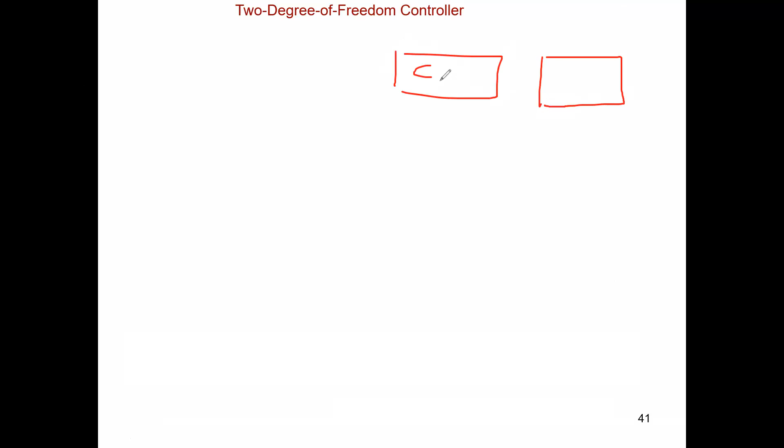In undergraduate, normally you have a plant, you have a controller. You only design one controller. This is the system you want to control. This is the standard, what we call a unit feedback control system.

You just design one block for the controller. Here, you want to match both the poles and zeros. Then it means you'd better have 2 blocks, right? One is for the feedback controller design, the other is feed-forward controller design. So we have a 2 degree of freedom controller. The feedback is for pole placement, the feed-forward is for zero placement. And the feed-forward, I give you the answer, is just BM over B.

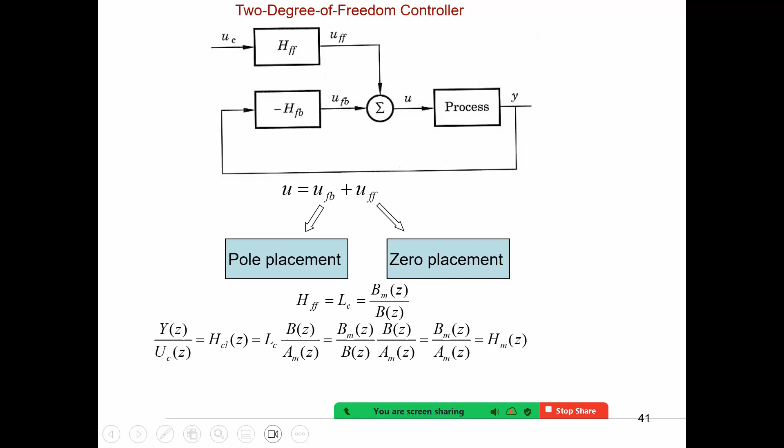Then we can compute the transfer function. If we follow this approach, this transfer function is just, we have shown that it should be LC times B over AM. But LC is BM. Here I replace LC by BM over B.

But you may say, hey, I did the first two lectures, always you have to be cautious when you should cancel out the common factor, right? Here I say I should cancel out. In this case, why do we cancel out this B? We say under what conditions should we cancel out: if the B's are operating on the same signal. Actually, if you look at this B here, it's operating on the feed-forward signal. This B is also operating on the feed-forward signal. That's why they should be cancelled out. Then, therefore, indeed, it will match the reference model completely.

Any questions? We can follow the reference model completely because here we're trying to use model reference control, right? The reference model will follow your trajectory, your desired trajectory. The reference model will meet all the requirements. Here we follow the reference model. Then whatever the reference model can do, your closed loop system can also do.

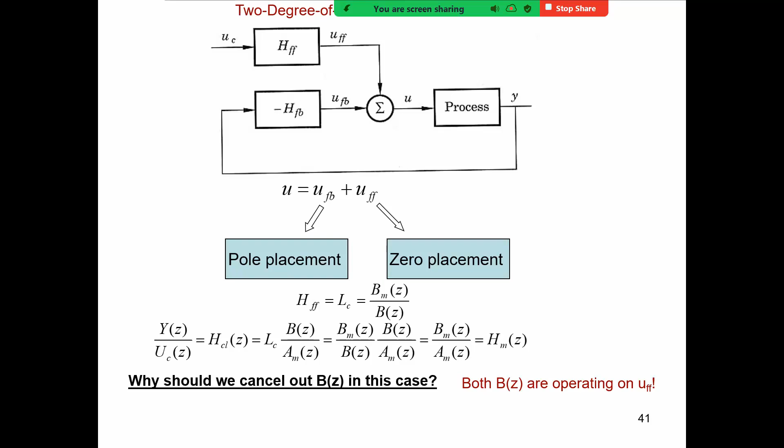Of course, you have to design your reference model carefully such that it can meet all the requirements. This is one way to solve the control problem. There are some other ways. In this course, for my part, I just focus on this way. Of course, in lecture 6, I will talk about some other ways, where I don't use the reference model. I just try to follow - you give me the desired output, I try to follow it. Yes, it can be done, by a different way, which you are going to learn. That's what's called model predictive control. That will be the second part of this course. This is the simple way.

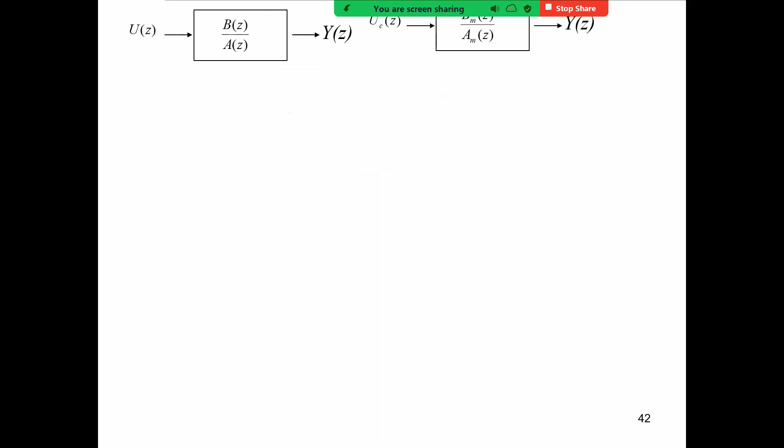So, any other questions? We can match the reference model completely, right? Now, this is what we call the 2-degree freedom controller. There are 2 blocks to design. This is the original, the open loop transfer function, B over A. After using the 2-degree freedom controller, we can match the reference model.

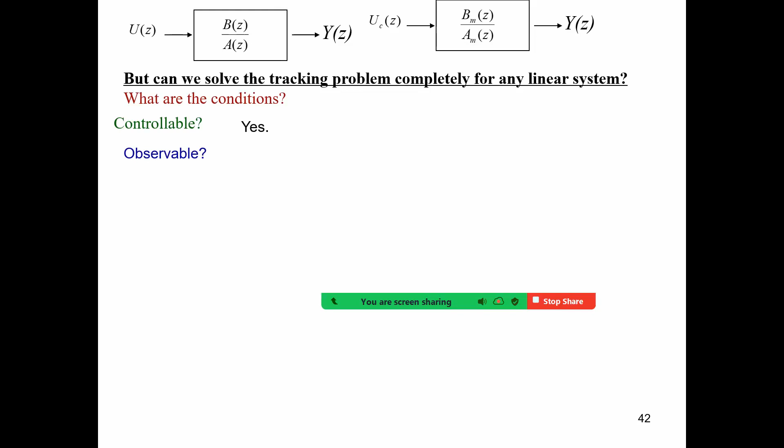Now let's recall what we have learned so far, and what are the conditions. Can we solve the tracking problem completely for any linear system? What are the conditions? Do we require the system to be controllable? We do, right? Otherwise, if not controllable, some of the poles may not be changed. Do we require the system to be observable? We do require that, otherwise we cannot estimate the state variables.

Now, do we require the open loop to be stable? Of course not, because we can change the poles to anywhere we like. That's the whole point of feedback. We can make the unstable system stable. So the poles of the open loop can be anywhere.

Now it looks like everything is in place. But finally, let's check out whether all the signals are bounded, right? We do not want to have a situation where some of the signals may blow up.

Let's first look at the output. Is the output bounded? We know this is the transfer function from the command signal to the output. It follows the reference model, of course, unless you design your reference model to be an unstable one. Of course, sometimes you want to do it, right? You want to sabotage the system.

Now, is the input bounded? Then we also have to know the transfer function from the command signal to the input. Then we know whether it is bounded or not.

So this one is easy. We know the transfer function from command signal to Y, right? We also know the transfer function from the input to Y. From those two, we can take the transfer function from the command signal to the input. And we have this form.

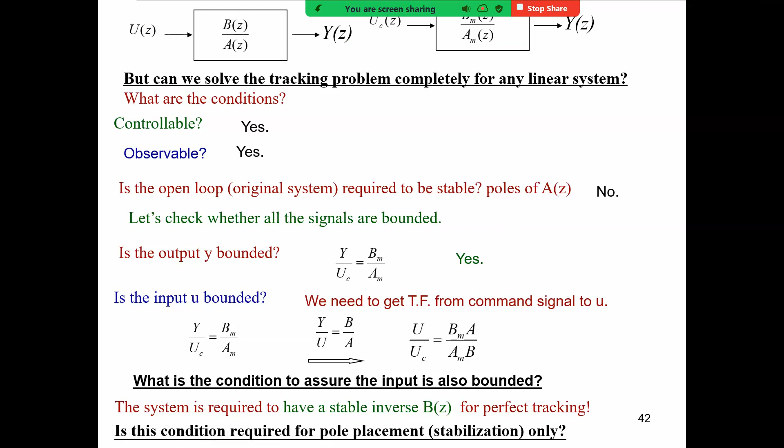Right, so let's summarize what we have learned to solve the state space approach problem. We try to match the reference model, so we first design the state feedback controller. In the first step, you assume that you know everything — you know all the state variables. You design. If there is a disturbance, you also assume that you know this disturbance, and you design the L omega.

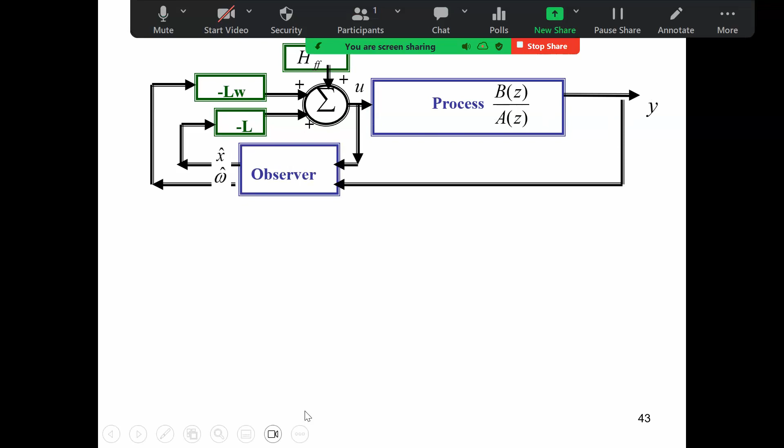Then the next step, you assume that you don't know them. Then you build an observer to estimate the state variables and the disturbance. And the final step, you design your feed-forward controller. So there is a 2 degree of freedom controller, right?

There are 2 blocks for you to design. How to choose L is the pole placement — you match the poles of the closed loop to those from the reference model. How to choose L omega? This one will be problem dependent. Our L omega will depend upon what type of disturbance, and it depends upon the structure of the model.

How to design the observer? That's another pole placement for the observer, right? You design your K such that the poles will match the poles from another polynomial A naught.

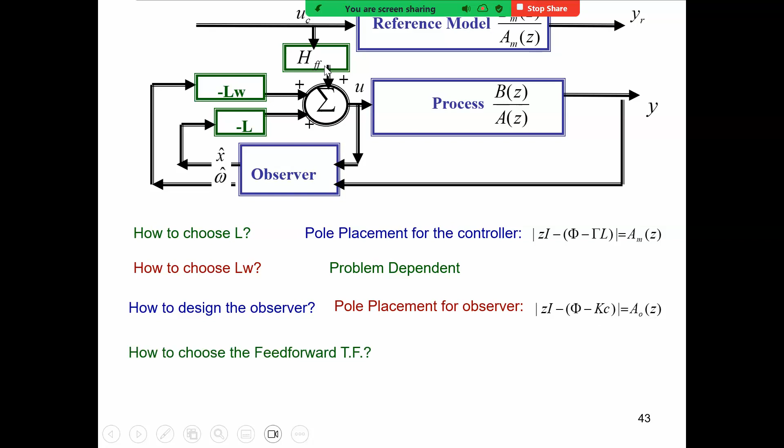How to choose the feed-forward transfer function? This one is simple — I will already give you the answer. It's just Bm over B, because I want to cancel out this B. That is the zero placement.

Now, finally, this B has to be stable for perfect tracking. If we want to follow this reference model completely, we require a stable inverse condition. Okay?